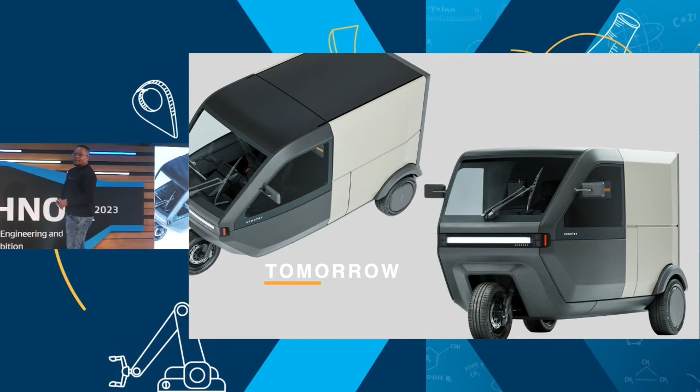So now we've migrated to the next phase, our Scooter 2.0. This is our next product, and it's going to be the most advanced electric three-wheeler in the world for a number of reasons. Currently, our product has a payload capacity of 450 kilos. This one, we're pushing it even further, carrying up to 700 kilograms of goods, with about 3,000 liters of space, and you'll most likely reach about 400 kilometers of range per day.

If you look at it as an economic opportunity and you're building a product, you need to build it inside out, and understand who you're building it for, which I always say involves three things: the engineering side, the science side, and also the business. You focus on the job to be done with the product, the pain it's supposed to take away, and the gain the person using it is supposed to get. That's when products are functional, that's when you're building things that people love.

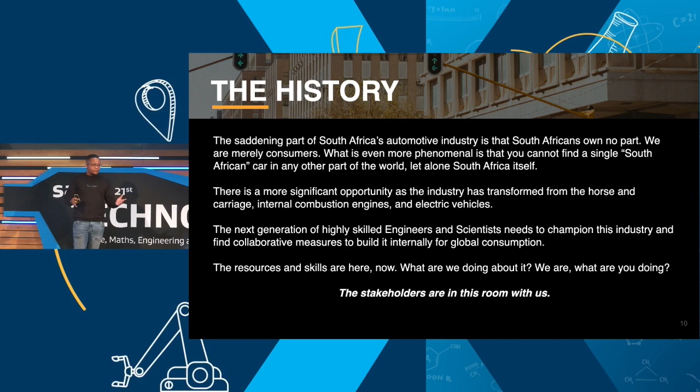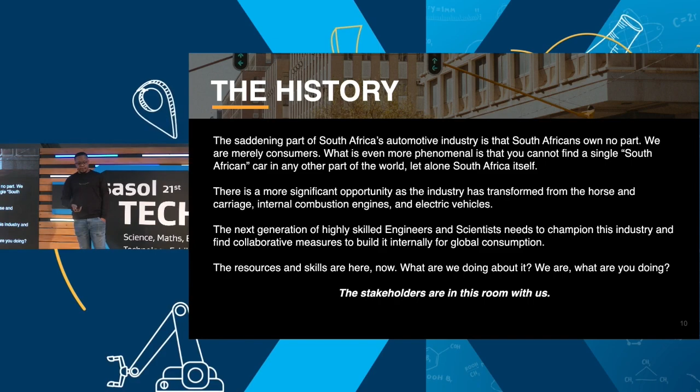So the resources and the skills are here today. This is the tomorrow we talk of, but this is the tomorrow that we need to be equipping efficiently. So what are we going to do about it, and what are you doing about it? The stakeholders are in this room to also help transform it. So we hope that with that, there'll be that investment.

South Africa has also built a world-class automotive sector, production capacity through state support and ongoing collaboration with global OEMs. The shift from ICE to EVs is a disruption trend for the automotive industry worldwide, and South Africa is no exception. So we have to take part of it.

What people don't know about electric vehicles is that they actually date back all the way to 1834, where that was the first type of vehicle that was built. What it was pretty much used for was first mile and last mile transport. She'll have the mom who's at home who will go and use this, wind up the electric vehicle, and use it to go buy groceries and then come back home. And this thing actually happened way before the trends even came up.

So what you actually have to realize is that you don't have to wait 10 years or 7 years, as the speculators would say. You can actually do it today, because it happened over 100 years ago—actually 200 years ago. And we need to understand that, you also need to understand why it did not work and why it did work. There's a lot of things when developing and creating products that you have to R&D, but always look beyond the seams. You know how they always say, the devil's in the details, right?

And EVs are important for Africa for its positive economic impact. The genesis of what will drive Africa's agenda in terms of owning this important economic sector will be done by Africans for Africa. If anything, when building products and you're going to constantly think of importing it right throughout in terms of end-to-end value chain, it's never going to take us anywhere. It's never going to enrich the actual society that it needs to enrich.

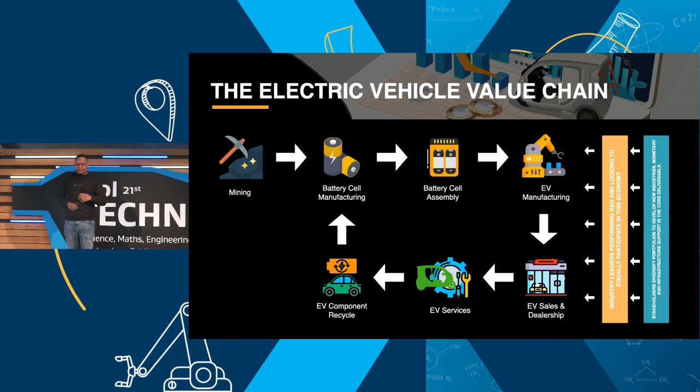You've got EV manufacturers, you've got the sales dealerships, EV services, and the EV component recycling. That, in ourselves as a company, is where we focused ourselves in making sure that we are literally the owners within that space. But where does this take us with all the people sitting here in this room?

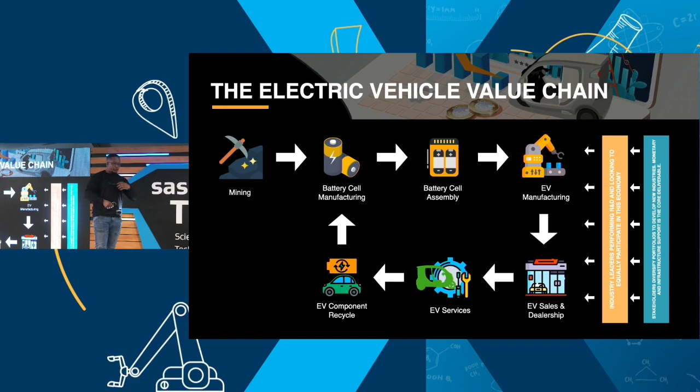If you can just tilt your head and read the side there, it says industry leaders could be performing R&D and looking to equally participate in this economy. So it could be anyone in this room that is working on a rotor motor, the batteries, motor controllers, in-hub motors and the like. Anyone could literally start designing and R&Ding something.

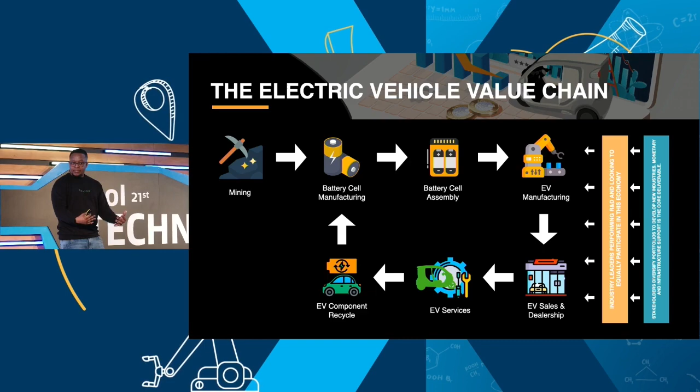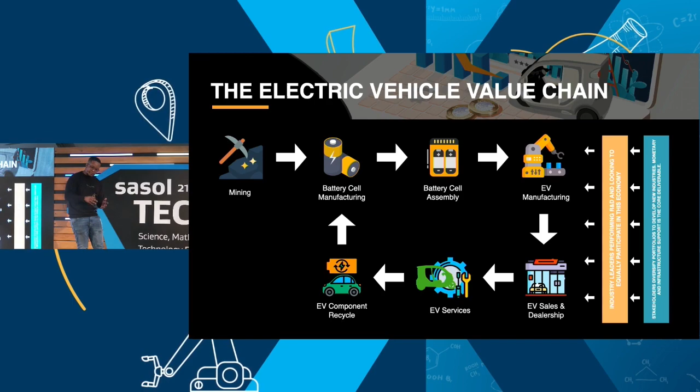The only issue is the next step: how do you finance that whole thing? Again, you have the stakeholders who've brought us into this room that can help you participate in it. Stakeholders can diversify their portfolios to develop these new industries. Monetary and infrastructure support is the core deliverable, so it can start today in getting people to start participating in the automotive industry.

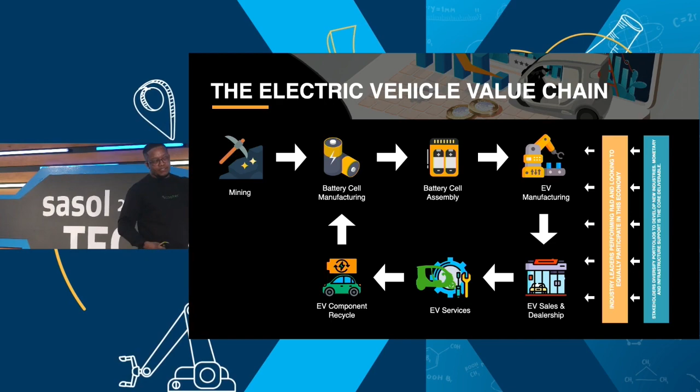Ford in Silverton has really invested about 15 billion. That 15 billion is to acquire space - they've acquired the space, 142,000 square meters - and that's where they're looking at doing assembly work for all of these electric vehicles.

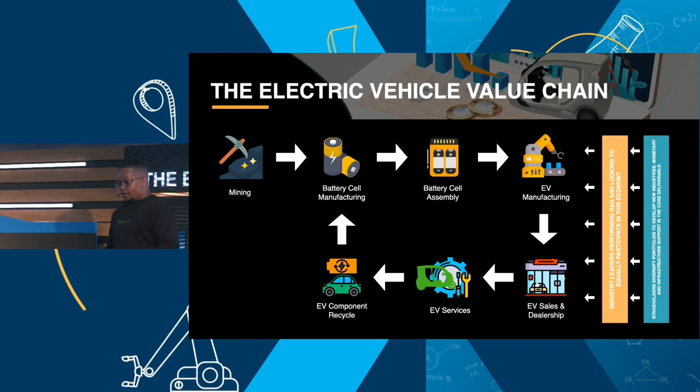What does it mean for you today? Not when you're done with matric, not when you're done with varsity, but what does it mean for you today? How do you start conceptualizing things? How we see the value chain - this is pretty much where we are as Green Scooter.

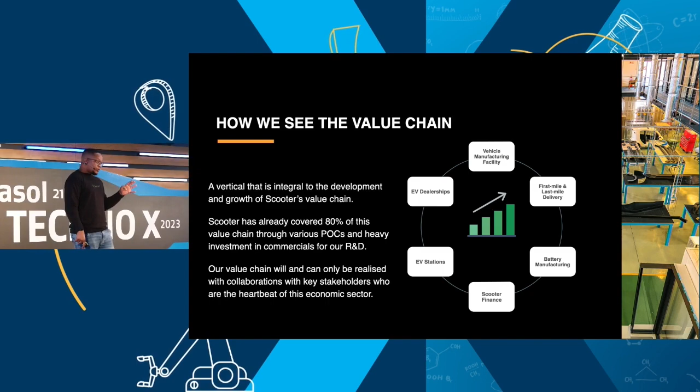We manufacture electric vehicles, we provide first mile, last mile delivery transport. We are working on our battery cell manufacturing. We are also working with another partner for scooter financing. EV stations is something we've been talking to many stakeholders, public and private, about since 2018, and also EV dealerships.

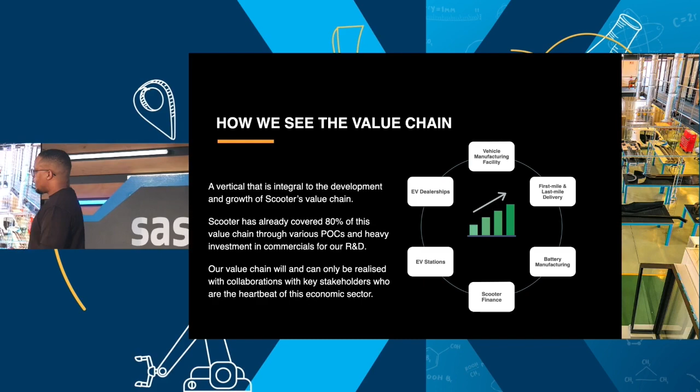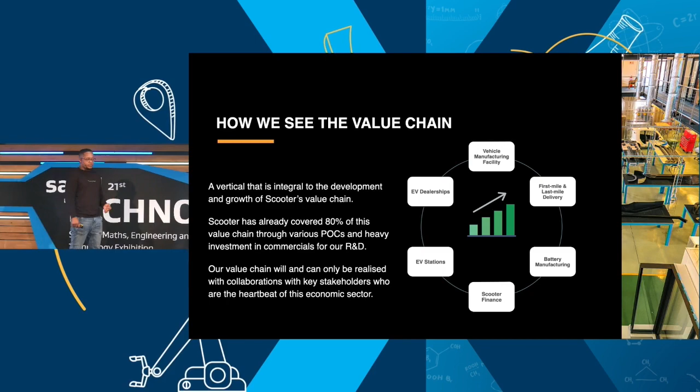Our entire approach, which is what I implore you to look at, is to always focus on a vertical integration of building your business. Vertical integration allows no disruptions. That's why it's so easy for a Tesla to sell 1,000 vehicles and make $1 billion worth of profit, while General Motors needs to sell 10,000 vehicles to just make $1 billion. That should be something that you look into.

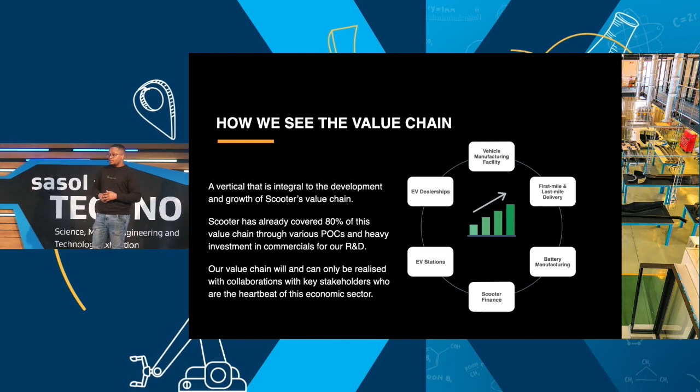Right now, with all of the stuff that you see there, we've done a lot of POCs with different companies that has given us our position within the market. If anyone talks EVs, they literally call us, and we provide our consultancy services as well. So if you wanted me to design a vehicle for you, or create an entire network for smarter mobility, you literally call us.

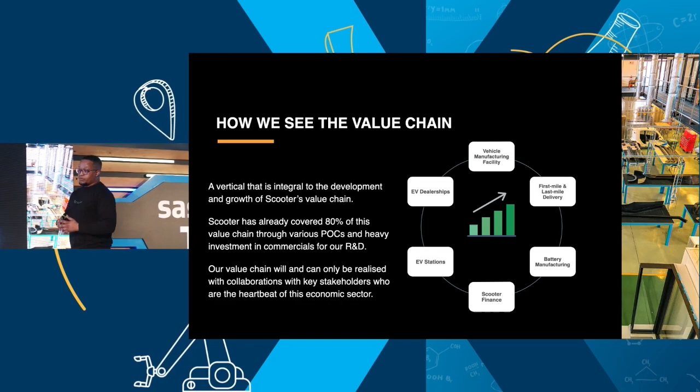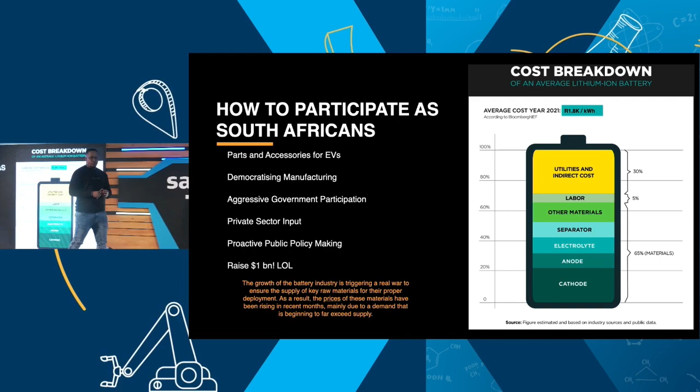As South Africans sitting today, and as the future STEM stakeholders, you can look at it this way: you can participate in this economy from doing parts, accessories for electric vehicles, democratizing manufacturing through 3D printing technologies. You can try and vie and get some aggressive government participation through proactive public policy making, private sector input.

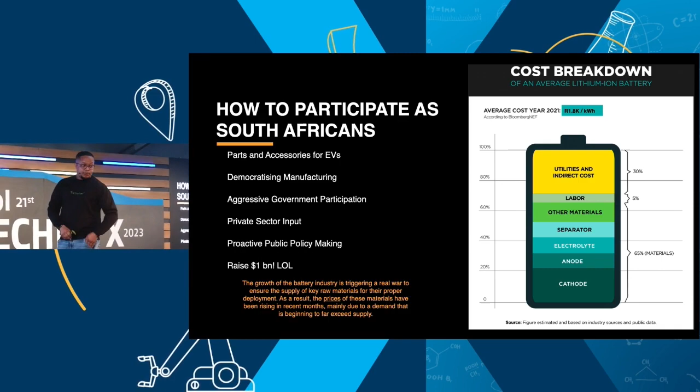I did mention the private policy. If you want to build a battery cell manufacturing facility at a large scale, try and get $1 billion - that's how much it will cost you.

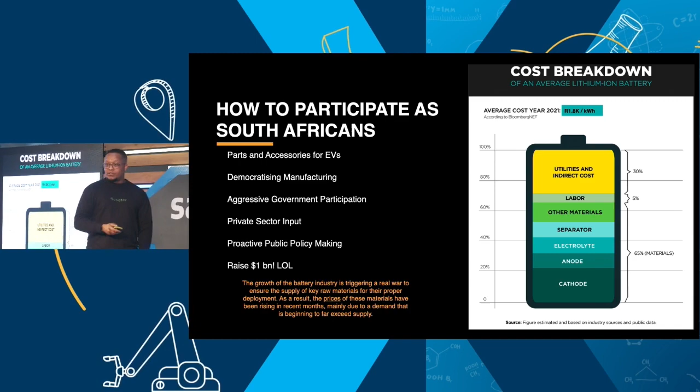South Africa needs to create an enabling environment for South Africans to equally participate in this multinational sector. South Africans need to raise these future technologies we are developing. These future technologies will also need to be split in the following way.

It's clean energy, business model innovation, and transportation as a service. Because at the end of the day, people need to move, people need to get somewhere. Mobility is a basic right. How do you define it?

Quick action points for any one of you today: you need to define your career interests early and have a plan to get there. But not everyone will actually know what they'll be doing by the time they turn 24, 25. I never thought I was going to own a business, but I eventually did it because I got obsessed with a problem.

If you see yourself in business, realize that business model innovation is going to be very important, because you're not just creating something hand to mouth. You need to create something sustainable that has longevity. You're not focusing on the optics, you're focusing on the actual sustainability side.